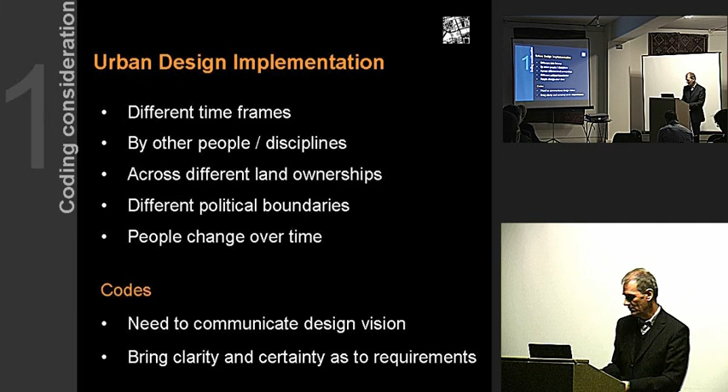So there's a need to communicate a design vision at the outset and a need to bring clarity and certainty as to the requirements. Just by way of a bit of fun, I actually gave a talk in London almost 20 years ago on urban design and design codes, and I had to explain what a design code was. And this morning I went and got out my 35mm slides that I did all those years ago and quickly scanned them in and put it down here just to see if it stands up for scrutiny.

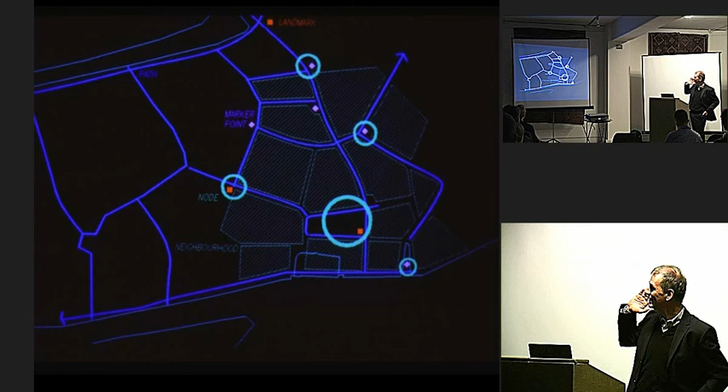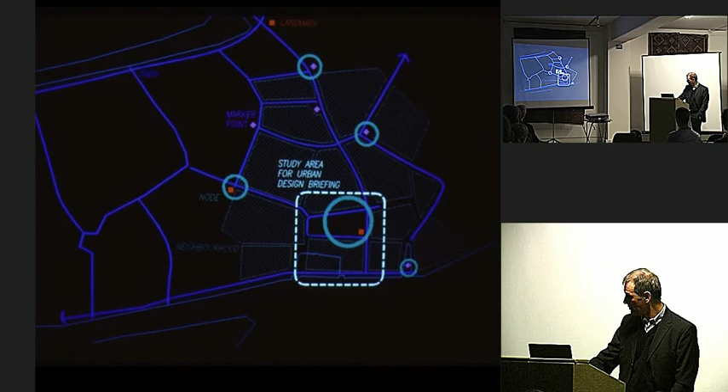So this was the example I gave all those years ago. It's actually a real place. So if you know where this is, shout out. It's actually a bit of a test for you. You should get this within 4 slides, being an urban design audience. So normally on a plan we've got a street pattern. We know where the main nodal points are. We may be focusing in on an area that we want to develop or promote renewal. Big node there on that one.

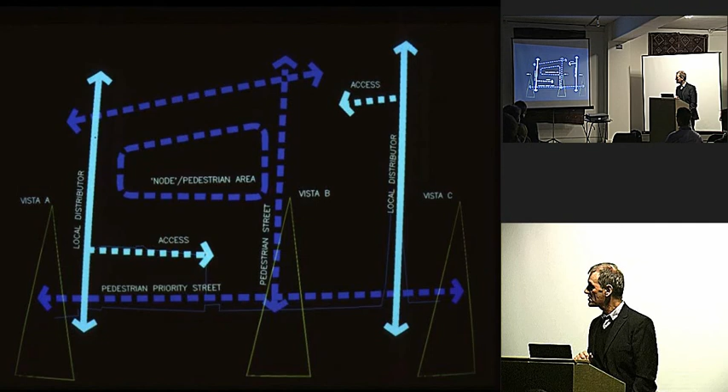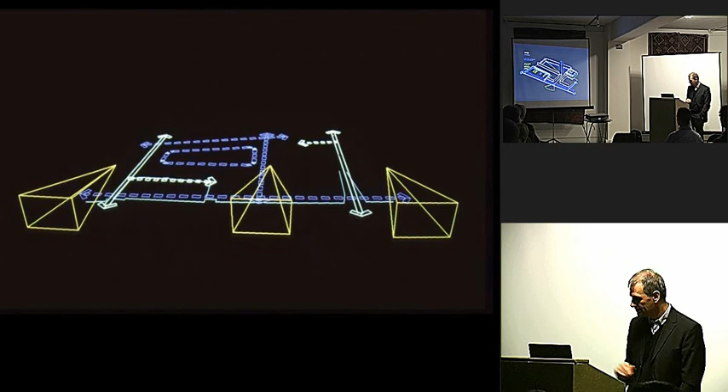We might be adding to it pedestrian access, key vistas, and 20 years ago, all of a sudden we could put things in 3D. This was a big deal, I guess. AutoCAD 2.6, I think, right? So you can add your vistas to it. It starts to get in 3-dimensional form. And by adding codes for build-to planes, build-to lines, where you want to turn a corner, where a landmark goes. Anybody got it? Slide 5. Had a room of chartered surveyors do mightily better than this.

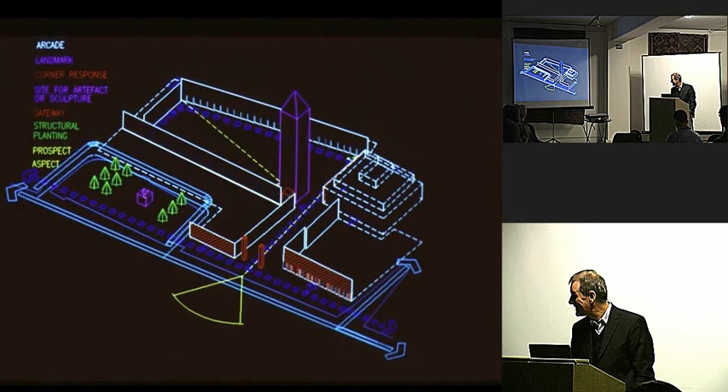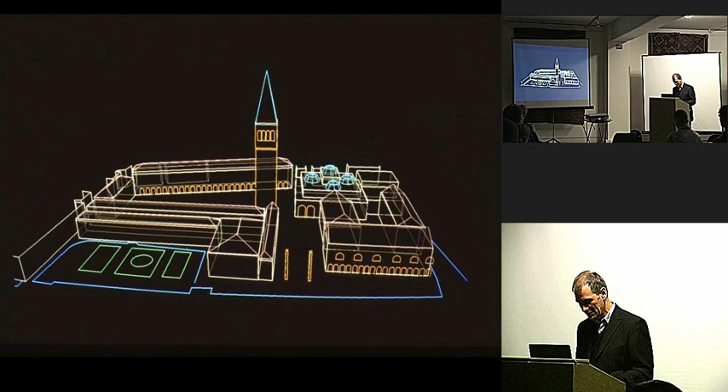So there's a set of urban design rules there that is controlling the built form. In other words, the term we used at the time was designing part of the city without designing the buildings. If I put some buildings into that, I'd probably give it away, remove a few hidden lines. It's obviously San Marco. So those are the sort of examples I was giving and talking about those years ago. And the techniques have got a little bit more sophisticated since then, but actually that maybe gets over quite quickly to a sceptical audience what you're trying to do with a design code.

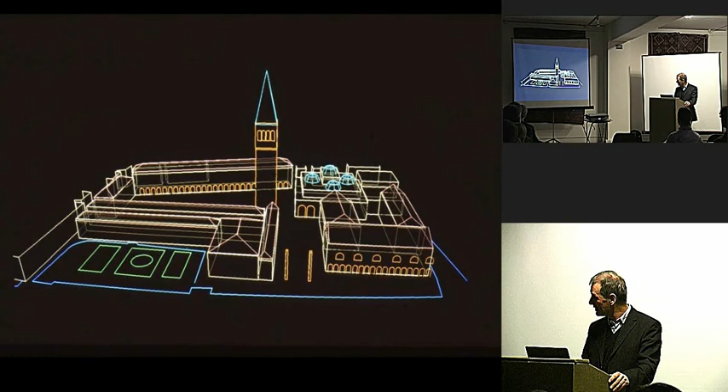Not that this audience is sceptical, but a room full of architects, for example, where you're having to justify why design codes. So what to code? I think there's 2 situations. As Ben's alluded to, generic codes, which are a generic code which might be applied across a whole town, and this would be done without a master plan. I think this has really got limited application, and I think it's a little bit of a concern that LDFs are being prepared with design codes attached.

If it's a design code without a master plan, I would call that probably a design guide. There are some applications where it can be used successfully. Both the examples I'm talking about this evening are where there is a regulating plan and the design code attached. And I would dub design codes the working drawings of the master plan. They explain the technicalities of exactly what you want to get built and distinguish between what might be illustrative on a plan and what is mandatory.

It's necessary to consider who is controlling the land, the resources available to do a design code. Often local authorities don't have a huge amount of resources to produce a code. Are there urban form issues? What is the size of the land parcel going to be? Are you going down to individual plots, or is it larger tracts of land?

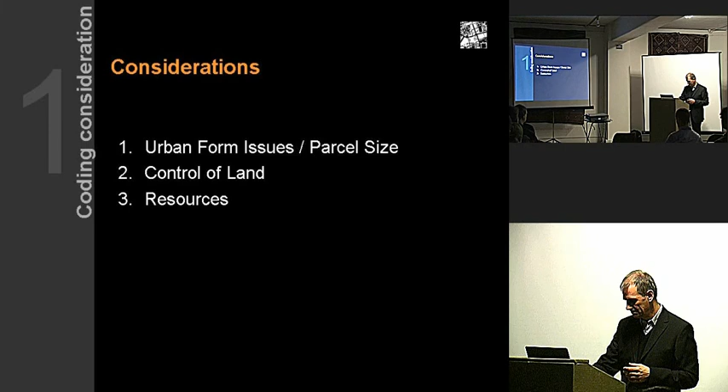We use 3 levels of coding, but slightly different to what Ben has outlined. At the first level, we view it as urban structure. So it is street pattern, the connections, street hierarchy, street alignments. It is largely 2-dimensional, but that street pattern, that movement pattern, is going to also determine land use and density. Obviously the major land use is going to accumulate along the more important roads in the hierarchy.

The second level, for us, broadly determines massing. And at this level we get into 3 dimensions: street sections, building frontages, building heights, envelopes, plot series, and these are effectively going to determine entrance positions for buildings, relationships between indoor spaces and the street, overlooking, etc.

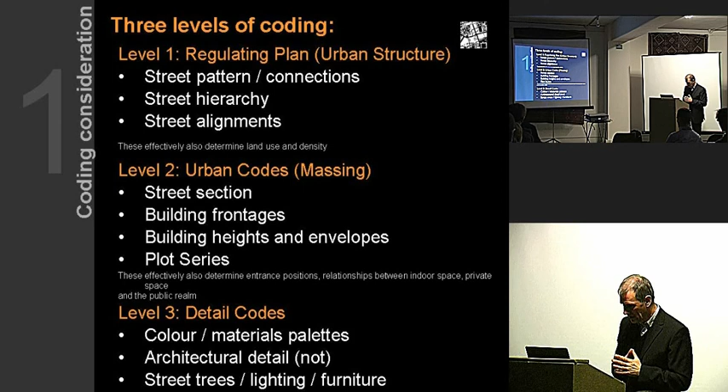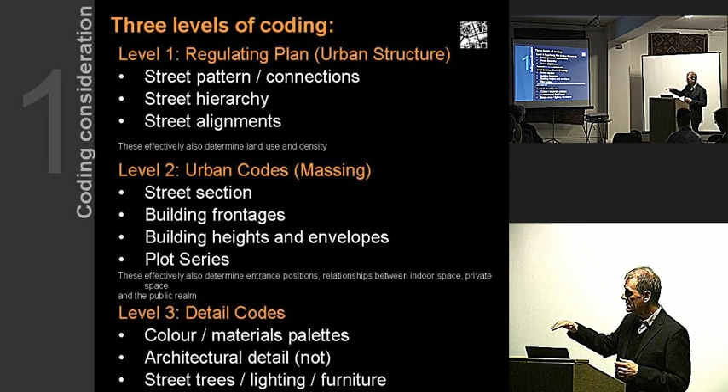And the third level we use are detail codes, which might be colour, materials, palettes, architectural detail or not. And I have to say we don't use architectural codes, I think, ever, and I'm not sure that on our master plans it's appropriate to control the architecture to that level. And then things that go in the public realm, the engineering of the street furniture, street trees, and so on. So those are 3 levels we work to. In some cases we might just be at level 1, on other sites it might be all 3 levels.

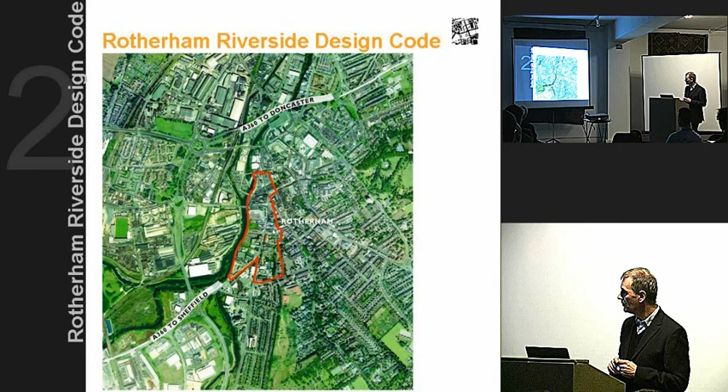On the Rotherham study, the site's outlined in red, quite a large tract of the town. It used to be railway sidings, railway station, but since late Victorian times has been industrial, now largely derelict. Fantastic frontage on the western edge to the River Don. If I can just put that into 3D form, you can see the land falling from the east to your right down to the river. Really very dramatic, but at present it's not possible to walk down to the river frontage, which is rather privatised and a shame.

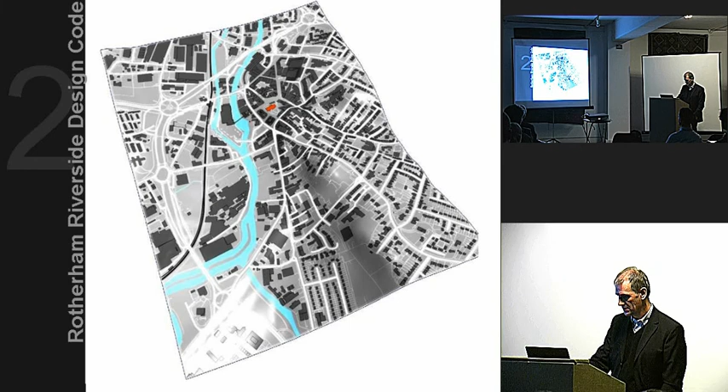We were asked by Rotherham Metropolitan Borough Council as client, plus the Pathfinder area, to encode what we call an urban design framework. It wasn't a master plan. The first problem we had with that is to say, well, you can't encode it. It would be a set of general rules. And for this kind of site, where you need to be much more precise about how the buildings are going to fit together, we think you need to devise a master plan.

And so that was a step that I take 2 steps back and develop the master plan from the broad urban design framework, and that's the master plan that you can see there. The little cut-out square on the left is showing how one particular block can be subdivided into 4 blocks or 1 large block, depending on the uses.

The word master plan has become much misused in recent years. I remember asking Rob Cowan how many uses of the word master plan there were in By Design, and I think the answer is none. Master plan was used a lot 20 years ago. It had a bad name as being too rigid, too fixed. We talked about urban design frameworks. All of a sudden master planning is back in and everything is called a master plan. My definition of a master plan is you can only call it that if you're doing it for the gentleman or lady who owns the land or controls the land. Otherwise it's more tactical and needs to be more flexible.

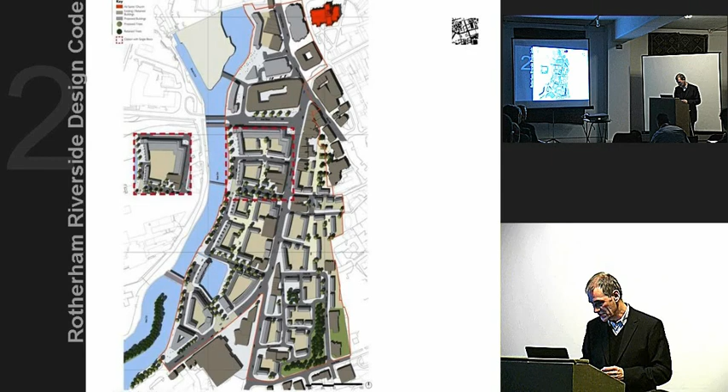So, a quick overview of the codes. They're colour coded here. On the top level we've got level 1, which is urban form, street pattern; the urban codes controlling massing; and at the third level, the detail codes here controlling materials for buildings and public realm.

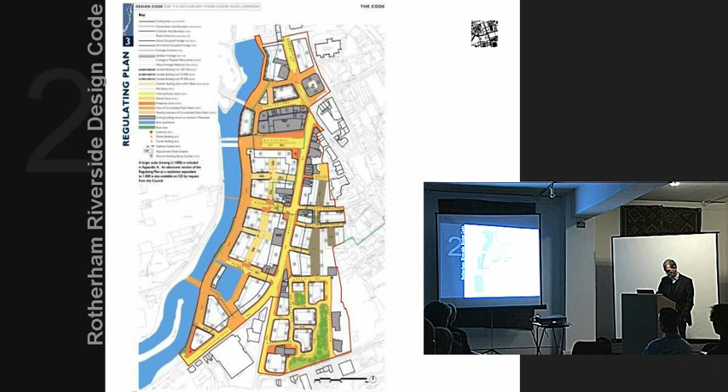That's the regulating plan that was produced. So there's a detailed set of graphic standards in that plan that you need to look up on the left. Whether it's a build to line, you've got to build up to it. If it's a build within zone, the frontage of the building has to sit within a zone, etc. So you have to follow the graphics, and the graphics need to be fairly precise and clearly explained. So, detail of that.

And just a few pages from the code itself. First of all, explaining the different character areas, the vision that evolved out of public involvement events, what the local authority vision is for the area, so you're giving a reason for doing it.

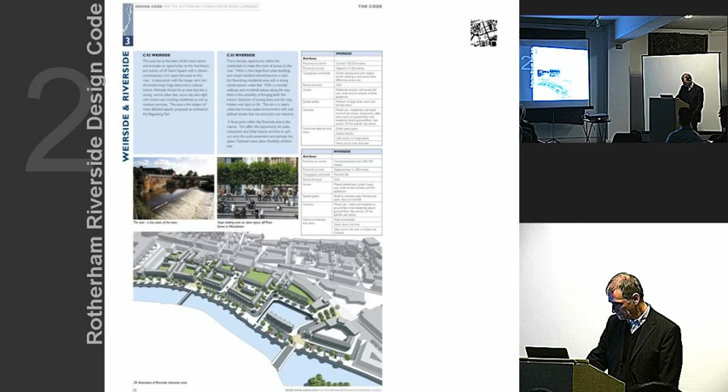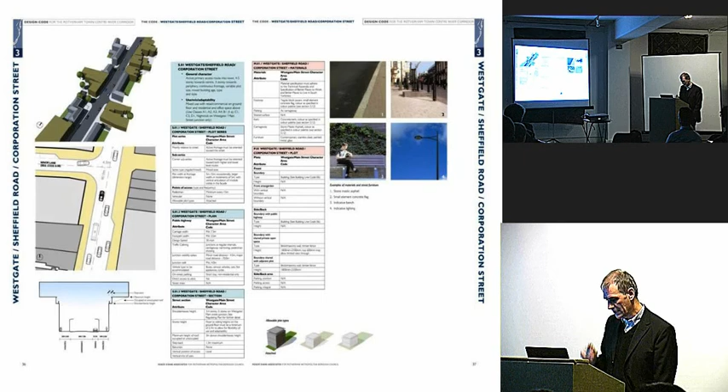This sheet here is showing the different levels of detail. The colours are fading out a bit from the angle I'm at, but they should be in blue, green and a pinky colour, showing the different codes that are being applied. I can come back to that if anybody's interested in that level of detail.

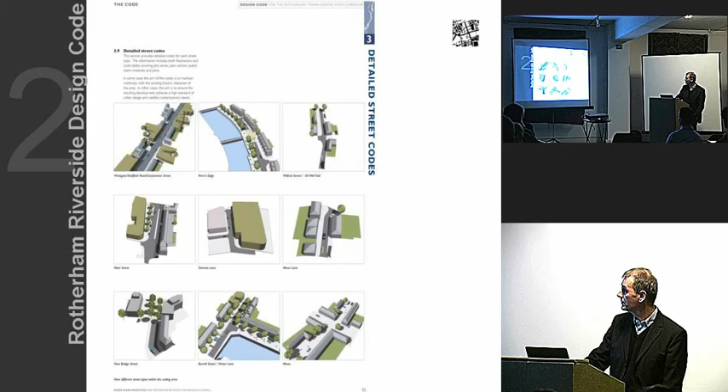So this was adopted on completion as a supplementary planning document. It's only one of the 8 CABE projects to be adopted in that way, and is being applied now and used to control development. Just a point about the implementation process of that. There should always be a loop for if anybody challenges the code to revise it.

So in this case, if a planning application comes in, I can't point, I've been told to stand on the chalk mark here, but look at the third column along in pale blue. If there's an application where an applicant is saying, we actually want to do something a little bit different, and the first code in our manuals is always, if you want to do something different, maybe you can make a good reason for it. So if they say that, the proposal would come in, application for minor variance, there's then a technical procedure to go through, so the local authority can sanction that, and that may or may not then be approved.

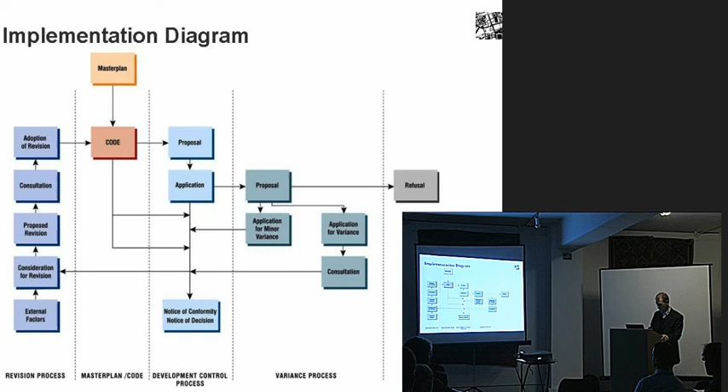Different situation on this greenfield site in a new town. Newhall is on the eastern edge of Harlow. It's that gap there you see in the urban form, moving towards the M11.

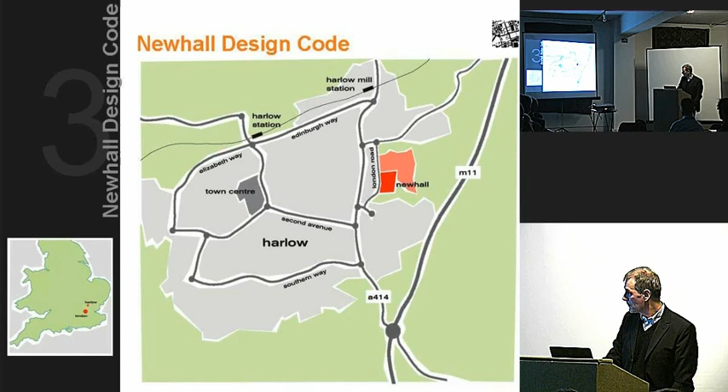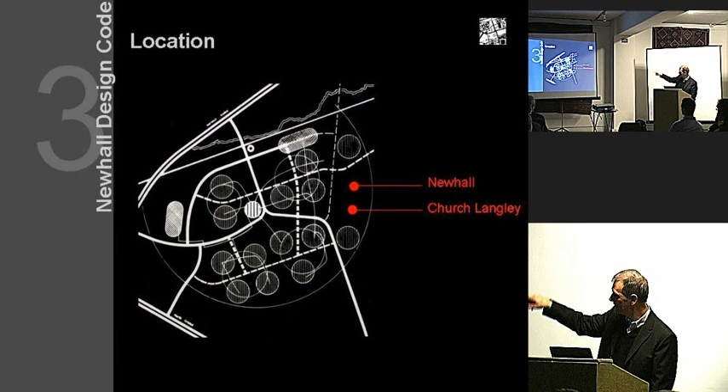This actually is a drawing produced by Sir Frederick Gibberd in 1952. He got the job for designing the new town in 1945, and his report for the whole new town was 24 pages. Beautifully succinct, much of it hand-drawn. You wouldn't even see a proposal to do the job now in 24 pages, yet his report, a model of clarity, 24 pages. In 1952 he got some reprographics out and went and neatened it up and produced this drawing, and this just shows how he is, as you might guess, identifying neighbourhoods which group together to form districts, and where Newhall sits in that series of linked neighbourhoods.

On this site we were working directly for the landowners who wanted to develop or control the process themselves. They wanted to control the long-term stewardship of the land, and really posed 2 questions. First of all, why can't we build somewhere that people would like to visit? I'm going back 10 years here when this process started. And the second premise was that if we can develop somewhere that attracts people, then it could also attract investment.

And we did a tour of places that we thought worked. I was going to say we didn't find a single large housing development. We did. We looked at New Ash Green and 1 or 2 projects that did work. But they were largely historical examples that we thought worked the best.

This is Bath. It's speculatively built housing. It still functions today. It's got flexible uses, a successful public realm, shared surfaces, would fail Part M, but I think still pretty good. So, in a way, that slide there was a model for what we wanted to do, but to do it in a contemporary way because we'd be building in the 21st century in a new town.

All the master planning we do is done by modelling. We normally model at 1 to 500, so they're quite large models, and once the street alignments are worked out from the landscape and the ecology reserves, we're then modelling in bits of foam with individual plots to test out the design. These models are then photographed from the top, all stitched together in Photoshop, and then we get a drawing. So the first drawing we get is a photograph of the model.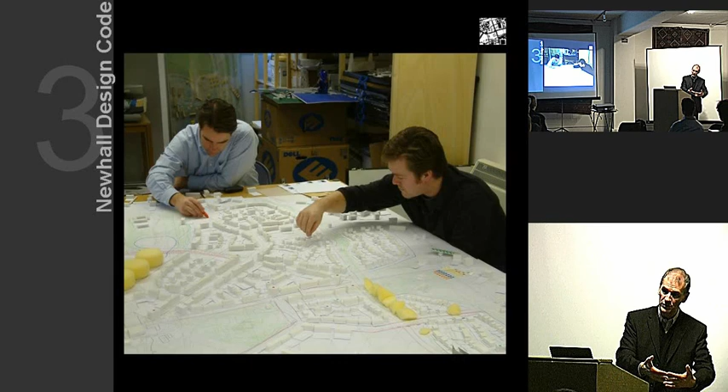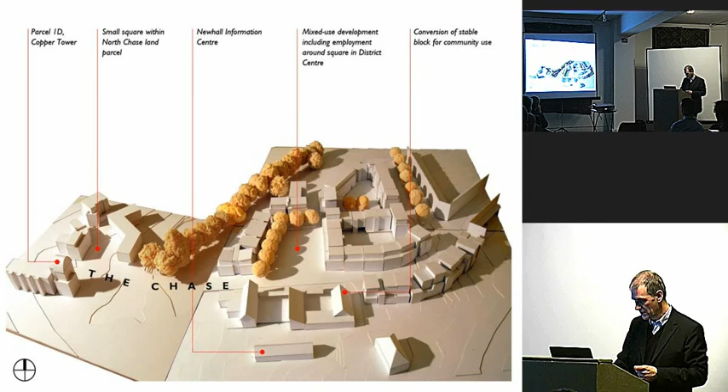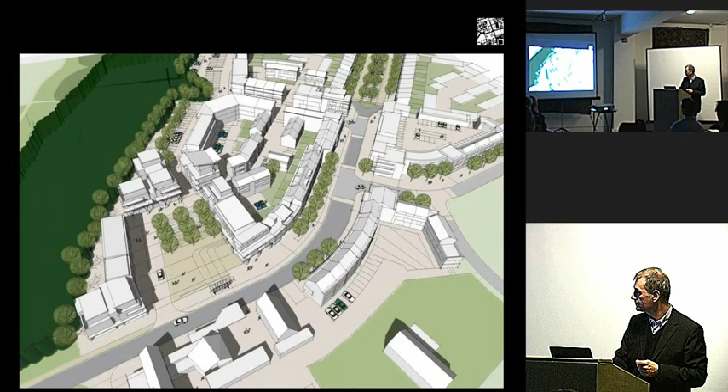A bit more detail on the model. This is the phase that's currently being built on site at the moment. Should be finished towards the end of the year. Getting a little bit more precise here with the master plan for engineering purposes. So this amount of work is being done before we start producing the design codes. Now the design codes are transmitted to the developers through covenant, so they are attached to the land sale. So we've in theory got DC powers through covenant.

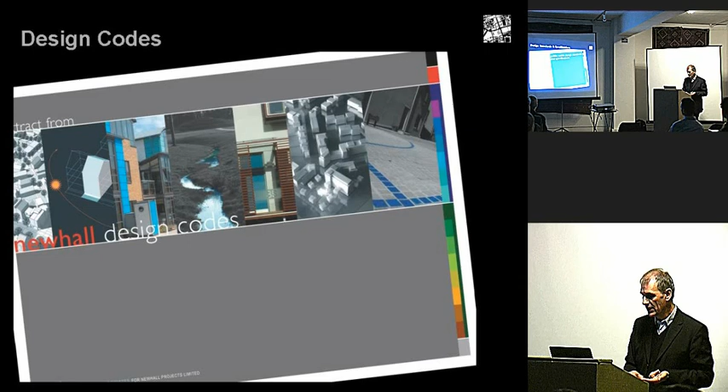There are 3 volumes to the codes. There's the codes proper, which I'll look at here. They are accompanied by public realm design standards and specifications. This used to be in the codes, but frankly we had so many problems in the public realm, especially where it joins up, where each developer hadn't done exactly what was wanted. We decided to remove that amount of discretion.

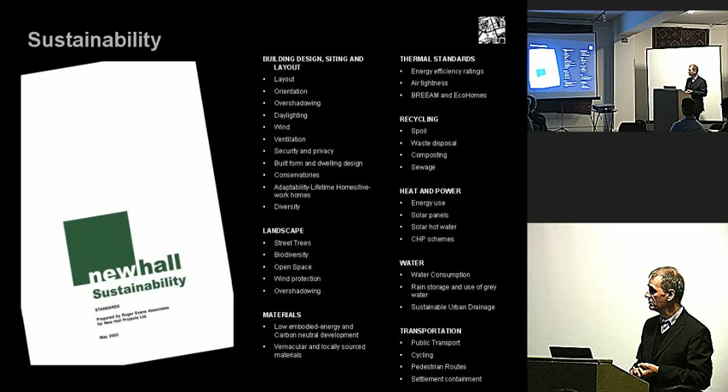We also found that developers would go to highway authorities and say, you don't really want to go along with all this design code, let's just put the roads in as we usually put them in, shall we? So developers now only go along to the meetings with the county engineer escorted by an urban designer, so it makes sure that doesn't happen. The third volume is the sustainability standards, which are revisited now quite regularly. The standards we set, which were way ahead of the building regs 10 years ago, have been superseded twice over, so they are continually being revised and updated.

Just to show you one particular brief, this is a little part of the first phase. The total development is about 7,000 people, 3,000 houses, 2 hectares of employment, 2 primary schools, utilising an existing secondary school, convenience shops, services. So a particular individual parcel, and no parcels are bigger than 100 plots on the residential side, is being outlined there, and actually drawing the boundary around the parcel is a really key design decision.

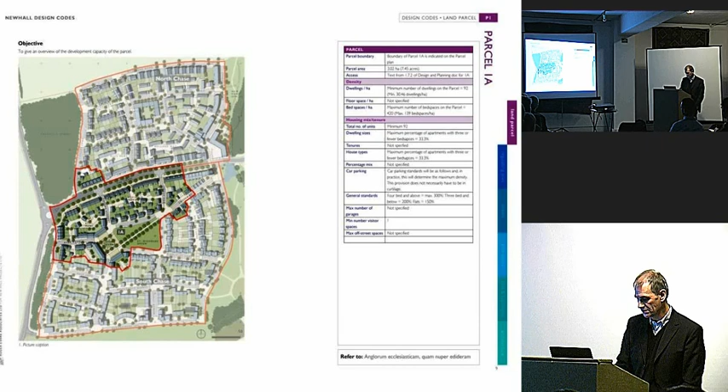On this project we're working with 6 building typologies, not types, but typologies, and those typologies govern where the building sits on the plot and its orientation. So typically streets with close to east-west orientation would be largely terraces. Streets which are more north-south are going to be detached villas, or there'll be typologies where elevations pop up and down and they've got access for passive solar. So there is absolutely no need for regimentation of streets to achieve passive solar. You've got a range of typologies which you can make fit any sensible urban design plan.

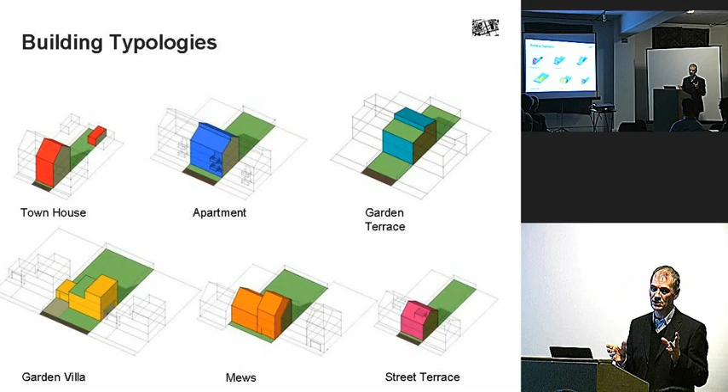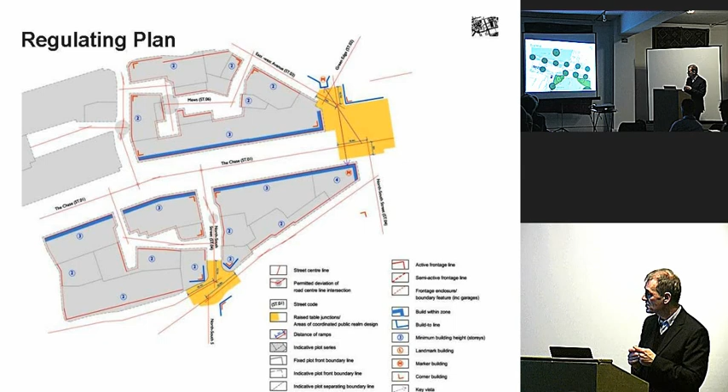Before we've got to that stage on the regulating plan, obviously there are exercises looking at detail in the master plan, tracking car movements. We have to know it's all going to be adoptable. Typical junctions, that's a crossroads. This was quite hard going 10 years ago when we took this for adoption. We said crossroads are dominated by cars. It's exactly the places where people on foot want to cross the road corner to corner. We're going to make those into small squares, small courts, no road markings at all. We want to plant trees in the middle of the road, and got all that agreed for adoption. Took about 3 years to get it agreed.

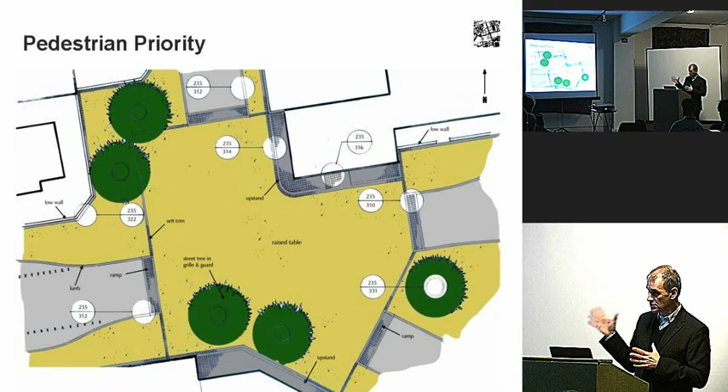Problem was nobody would adopt the trees anywhere on the scheme, so the Residents Association adopts trees and much of the landscape, and that's been hugely helpful, and New Ash Green has been a useful case study.

I mentioned there's no controls on architectural devices at all, which is fairly common on our projects, but we do place great importance on colour and material palettes, and these are drawn up based on the work of the French colour theorist Jean-Philippe Lenclos. This one we produced with the artist Tom Porter.

And if you don't know the technique, the premise is that all settlements are unique by virtue of their mineral setting. They have a unique chroma by virtue of their mineral setting. So the technique is to gather soil samples, lichens, fragments of buildings, and the little collage on the left, you see that, and then using very accurate colour chips, produce a palette which matches that.

And there's 4 palettes on this project. There's one for floorscape, one for elevations, one for roofscape, and one for highlight colours. The little collage on the right are then photographs of built form, which intentionally will have similar colour hues. So we're relying on that to link different pieces of architecture.

There are certain materials which are required to be used. There's only 2 bricks allowed on the job. One's red brick, it's a handmade brick, the other one's a semi-handmade brick. If it's a slate, it comes from two quarries in Wales. The actual cost of specifying those materials is much less than 1% of the total cost of any development parcel. It's a surprisingly small amount.

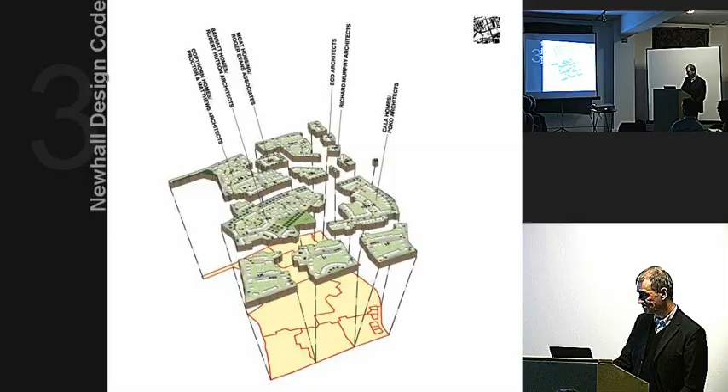Phase 1, which is approximately 500 houses, shops and some offices, is broken up into that number of land parcels. And just to explain how we parcel the land up, because most of the books you read say always draw the boundaries between bits of development at the back of the plot, so you make all the joins at the back. That's certainly the way forward if you want an easy life, and for 90% of it it's probably right.

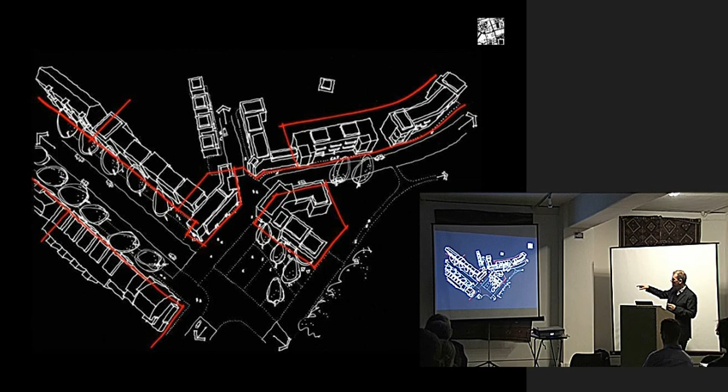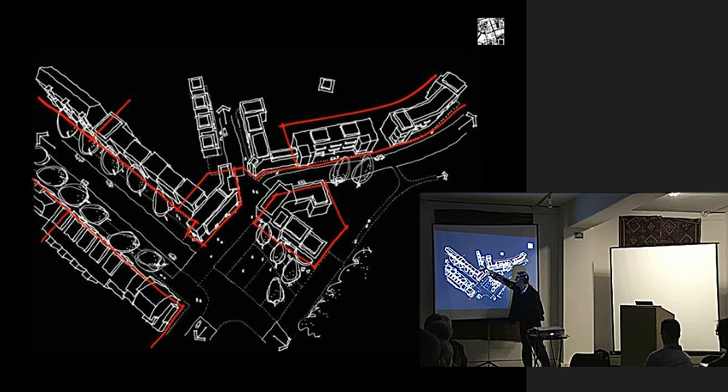But where you've got a major public space, and here's a small square that's now being built on site, we want to get the greatest diversity of architecture, so those little red outlines there are showing the different architects working around that square. In there you've got Richard Murphy working on, I'm going to have to leave the camera and point. Richard Murphy's over here. We've got ECD Architects, energy conscious design, working here, ORMS, Procter & Matthews up the street there on the Abode scheme. This is PCKO Architects. We are doing some work for those in my practice on that area there.

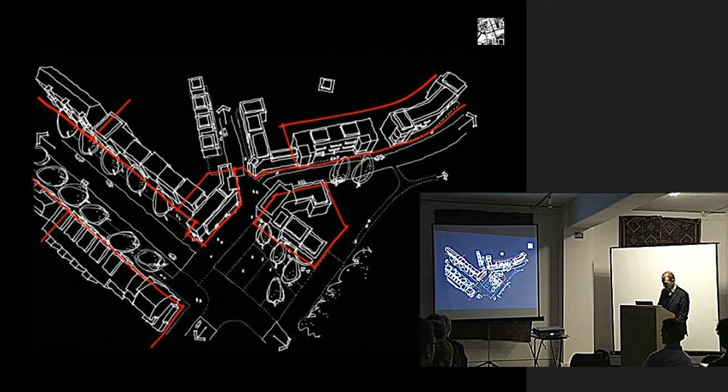So we've deliberately made it quite hard here and made the joins in the public realm, and that requires a much greater level of coordination and management. But that's where we wanted the diversity in this particular case. That's part of the first bits to be completed. Countryside with Procter & Matthews.

One example of design code feeding through is that the streets that are quite close to where the shops and services will be, we've asked for mixed use, and we've asked that the ground floors be flexible such that they could run small businesses or shops at a future date. We know it would be totally unrealistic to insist on that now, they'd just be boarded up. So they're sold as residential.

The ground floor is reserved, which could be a teenage flat, granny flat, could be a business, with main living accommodation on the first floor. So the detailed building typologies need to be flexible enough so that uses can evolve over time.

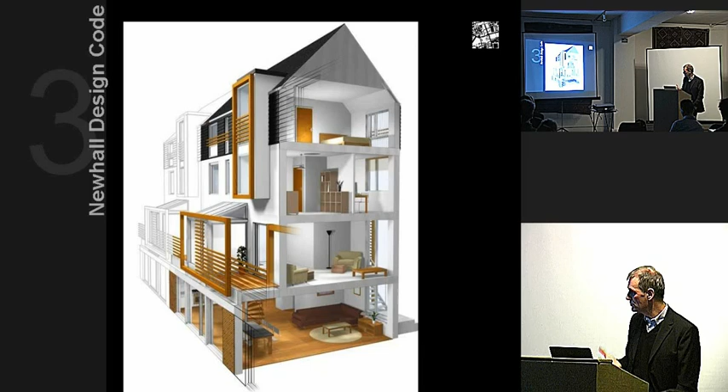There are rules for mews courts. They must have at least 2 dwellings overlooking the mews court. You have to be able to see all your exits clearly. Haven't got it right on every occasion, but broadly I think these spaces are working reasonably well.

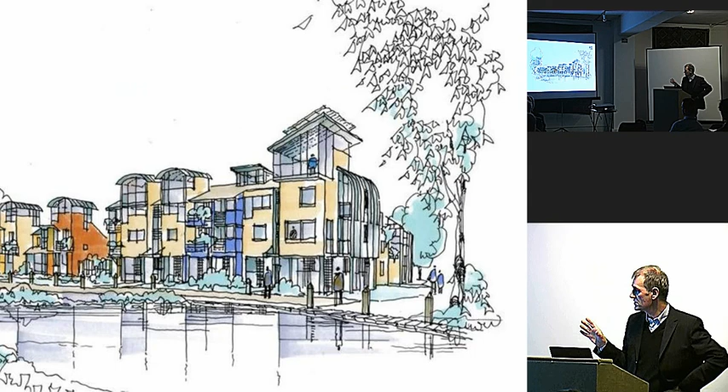Second parcel to be built, that's PCKO's competition-winning scheme, and here we ran an architectural competition, six practices commissioned to produce designs. They had to comply with the design codes as far as the street and public realm is concerned. That's the architect's renderings. That's what you get when you put a little asterisk saying landmark on part of the plan. But we absolutely loved it.

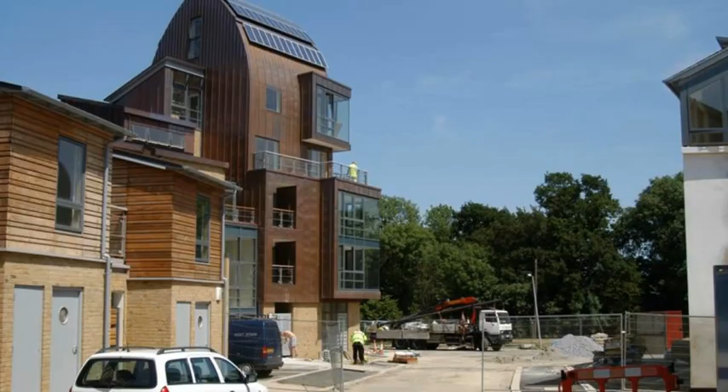It's actually duplex apartments stacked up, and we actually moved a road over to align on that landmark. That's now built. We're just waiting for patination to happen on the copper. Years of construction going on. Remember, this is volume house building.

The foreman on this particular land parcel, who started off saying, you know, what is all this about? Isn't this far too complicated? By the time we got to this point and the job was about to finish, he said, this is the best project I've ever worked on. An experienced guy, I know every rivet in that building, and he was really quite distraught to be leaving it. I'm pleased to say he's now remained on the project and working on a different parcel.

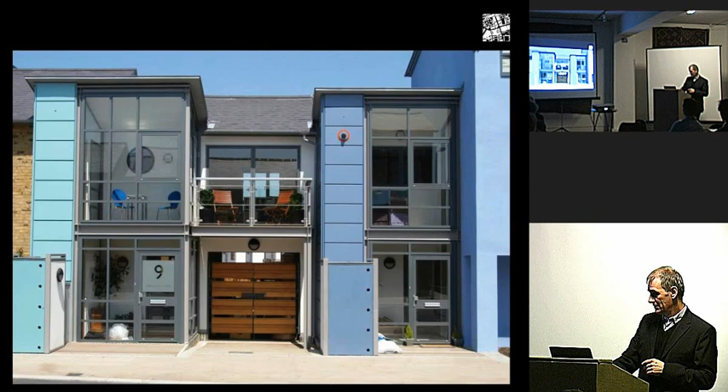A friend of mine who's a naval engineer told me that in the British shipbuilding industry, if they're building a submarine, they spend 1 year designing it and 4 years building it. In Japan, they spend 4 years designing it and 1 year building it. I think that's the difference when you're using codes. It's a lot of effort up front, but then you hope things will go much faster.

Just some conclusions from that. If you're preparing codes or thinking of doing so, be very clear whether the codes are generic or whether they relate to a regulating plan. They're very different animals. If you're calling it a master plan, make sure it really is one, and the person you're doing it for has got control of the land and you can implement it. Codes have got to be concise, they must be capable of being measured against, they must be technically competent, so as far as utilities, highways, etc., they don't trip you up. Always explain the reason for the code.

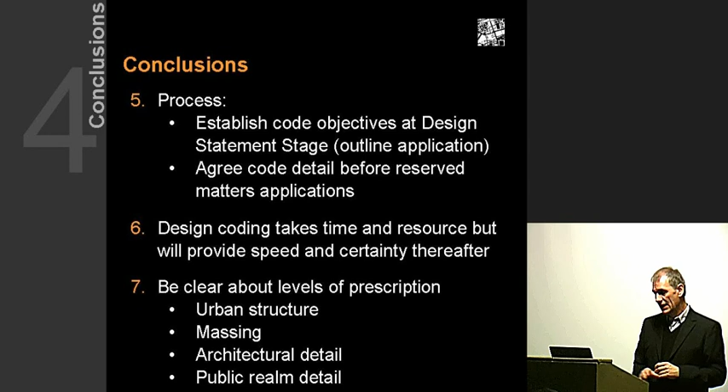Be clear about the level of prescription. I've outlined our four levels. There are other ways of doing it. And beware that codes are not a panacea. They're just one tool in the box. You need to consider design champions, how the land is subdivided, and how you're selecting developers and the architect team.